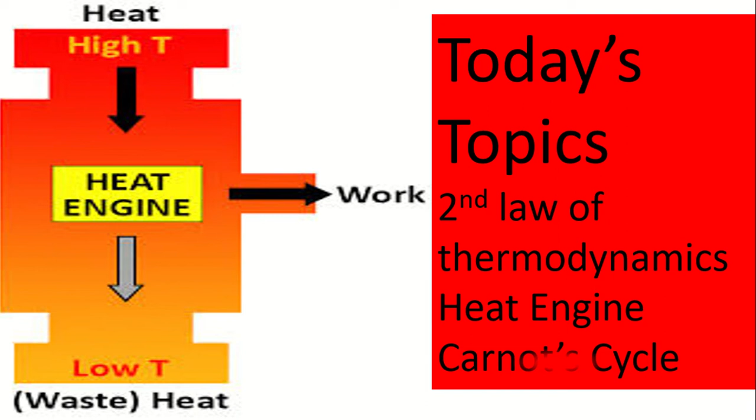Dear students, today I will explain some topics from thermodynamics: the second law of thermodynamics, heat engine, and Carnot cycle. So let's start the class.

At first, I will explain the second law of thermodynamics. I will explain some statements of different scientists, physicists.

Dear students, out of different energies, what is the speciality of heat energy? Do you know? All other energy can be converted into heat energy very easily, but heat energy cannot be converted into other energy easily. To convert heat energy into any other energy, a device is required. This device is called heat engine.

Depending on experimental experiences, scientists named Carnot, Planck, Kelvin, and Clausius, after various experiments, formulated the second law of thermodynamics. Different scientists have stated the law in different ways. So let's see what they think.

Kelvin Planck statement, at first: It is impossible for a heat engine to produce network in a complete cycle if it exchanges heat only with bodies at a single fixed temperature.

Clausius statement: It is impossible to construct a device operating in a cycle that can transfer heat from a colder body to a warmer one without consuming any work.

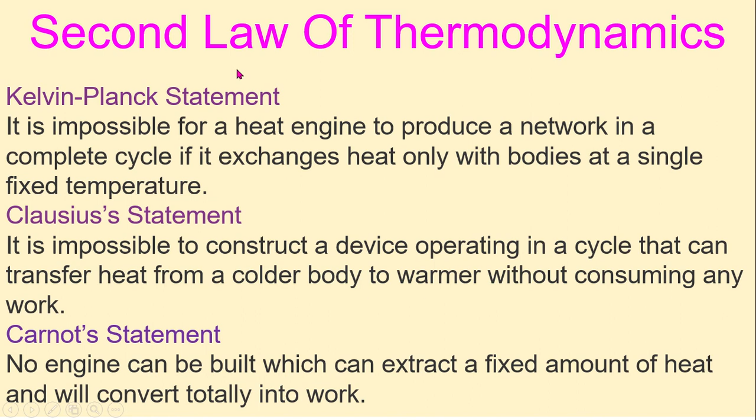So from the second law of thermodynamics, we came to know that for converting heat into other forms of energy, a heat engine is required.

So now I will explain heat engine. Heat engine: the device which converts heat energy into mechanical energy is called heat engine.

Look here, I have taken some gaseous substance in a container, and a tightly fitted piston is over there. Look, when heat is supplied to the system, then the gas expands. As a result, the piston goes upward. So if I keep some cotton or jute fiber on this piston, then the cotton or jute fiber will be compressed when the piston goes upward.

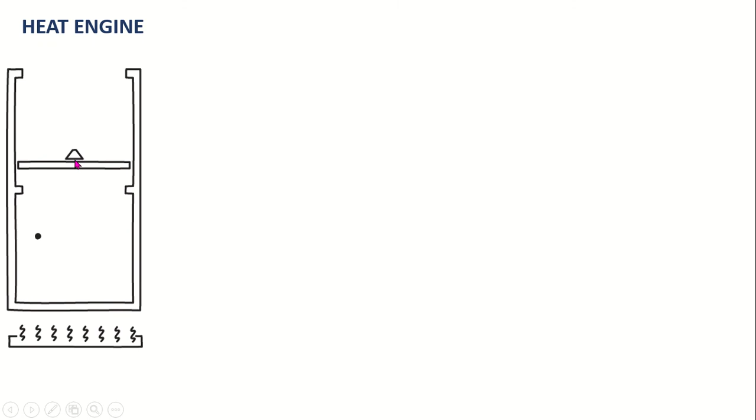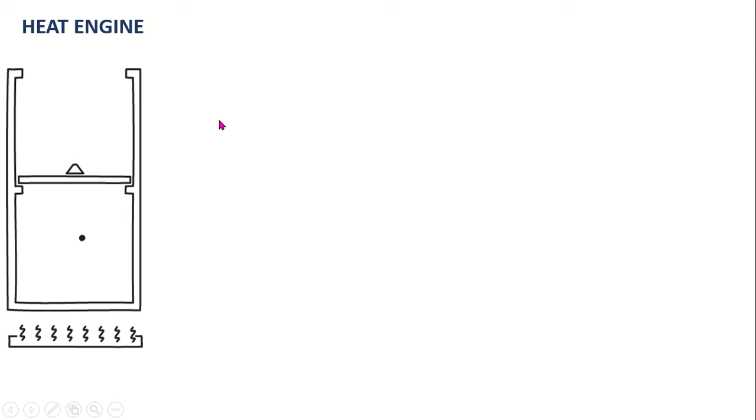So in this way, if I consider it as an engine, then it does work. That is, the engine absorbs heat from a source of higher temperature body and converts a part of it into work, and rejects the remaining part of the heat to a sink of lower temperature, and the initial condition is restored.

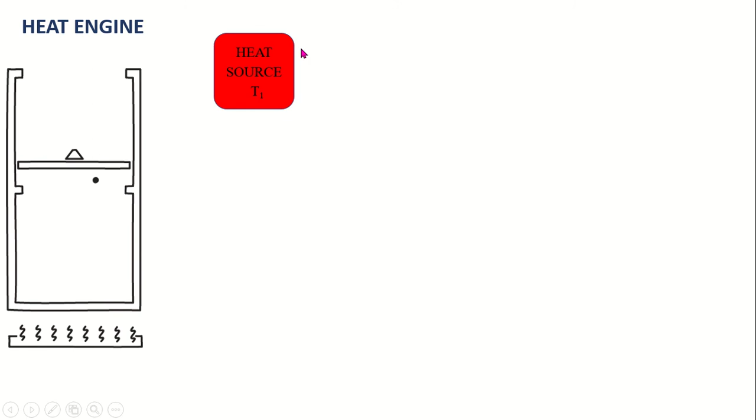So an engine has three parts: there should be a heat source which is at temperature T1, a system, that means working system, and a heat sink.

To get a continuous supply of work from an engine, the cycle of operations are to be repeated. Since the cycle of operation can be repeated indefinitely, the heat engine gives a continuous supply of work indefinitely.

So let's look here. Let a working substance such as a gas in a cylinder, look here, I have taken some gas in a cylinder fitted with a piston, absorb Q1 amount of heat. Here, this cylinder containing gas is the system. So this system absorbs Q1 amount of heat from the heat source.

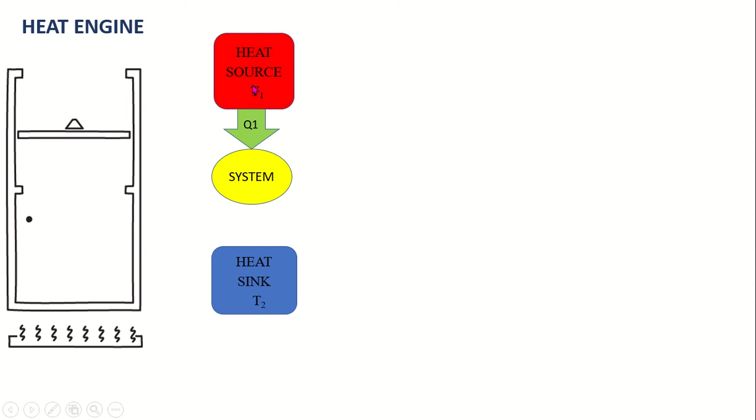Q1 amount of heat from a heat source of higher temperature T1. The engine attains the temperature of the source during converting a part of heat into work. That means here the system attains the temperature of the heat source, that is T1.

The engine attains the temperature of the source during converting a part of heat into work. Now to get work from the engine, that means to convert heat energy into mechanical energy, a part of heat absorbed from the source is to be rejected to the heat sink, which is at lower temperature T2. So the heat absorbed by the system, a part of that is rejected to the heat sink at lower temperature, so that the temperature of the working substance is lowered to absorb heat from the heat source again.

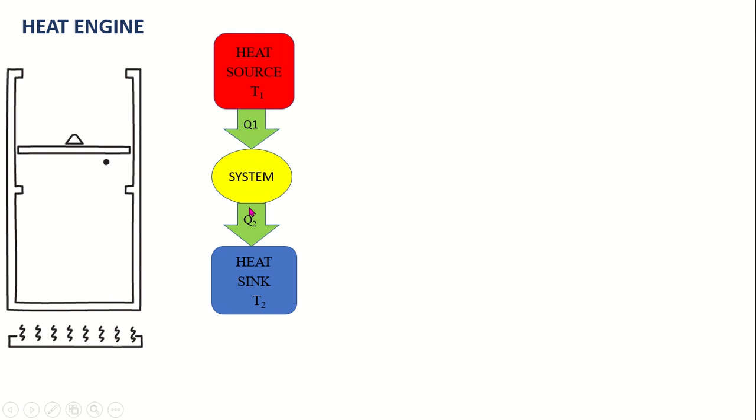So if Q2 amount of heat is rejected to the heat sink at lower temperature T2, the amount of work will be W. Here W equal to Q1 minus Q2, because the system absorbs Q1 amount of heat, then it does work, and then it rejects Q2 amount of heat.

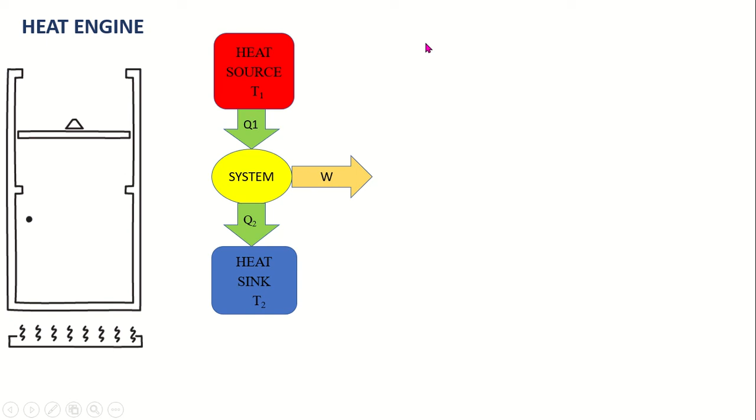So from the conservation of energy, we can write heat absorbed equal to Q1 equal to Q2 plus W. Here Q1 is the input and output is Q2 plus W. We know from conservation of energy, input energy equals output energy, meaning there is no dissipation of energy; energy is only converted from one form to another. So I can write Q1 equal to Q2 plus W, and from here the work done by the engine equals W equal to Q1 minus Q2.

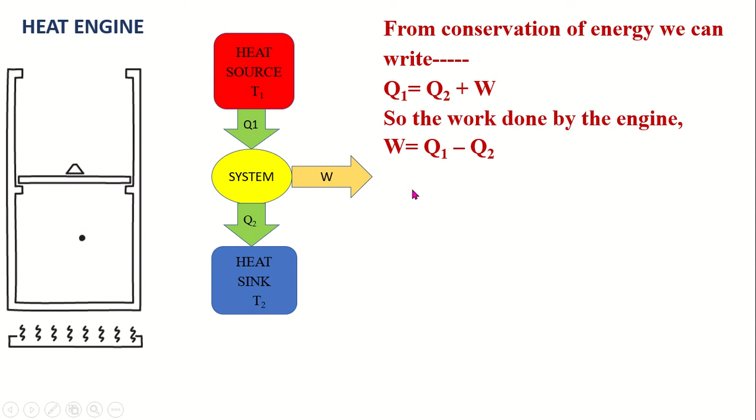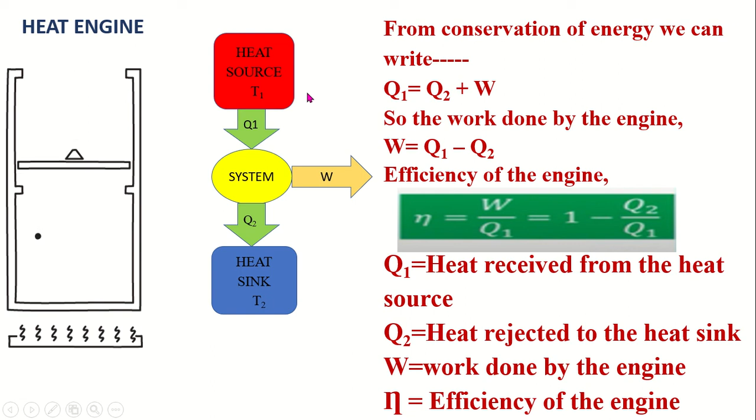Efficiency of the engine is termed by eta. This symbol which looks like small n is named eta. So eta equal to output by input, W by Q1, but W equal to Q1 minus Q2 by Q1. So we can write Q1 by Q1 equal to 1 minus Q2 by Q1. This is the efficiency formula of an engine, where Q1 is the heat received from the heat source, Q2 is the heat rejected to the heat sink, and W equal to work done by the engine. So you can see the steps of the engine, and eta is the efficiency of the engine. You have to remember, efficiency is calculated in terms of percentage.

Now I will explain reversible and irreversible process. Before explaining the Carnot cycle, it is very important to know about reversible and irreversible process. So what is a reversible process? It is the process which can be retraced in the opposite direction so that the system and the surroundings pass through exactly the same states at each stage as in the direct process.

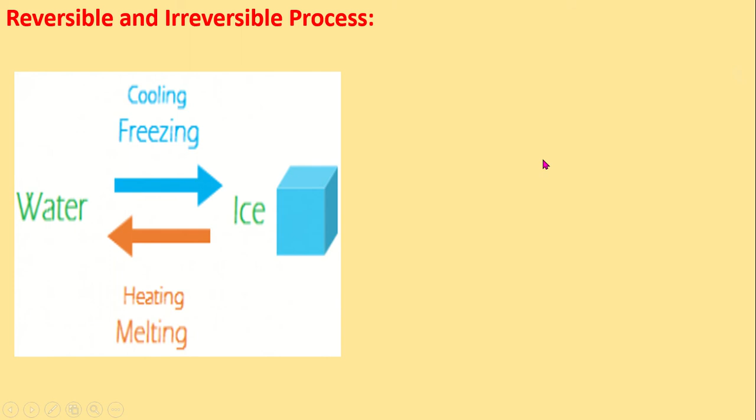Look here, water cooling or freezing converts into ice, and ice on heating or melting converts into water. So this is a reversible process. Ice turns into liquid and liquid turns into ice. It is a reversible process.

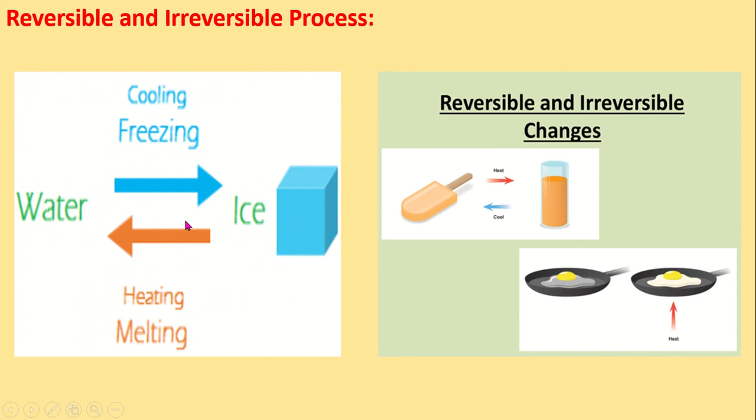There is a video which can make you more clear about irreversible process. So let's enjoy it.

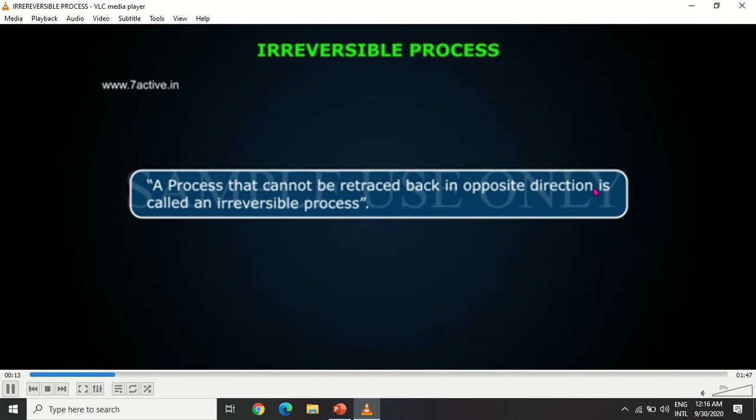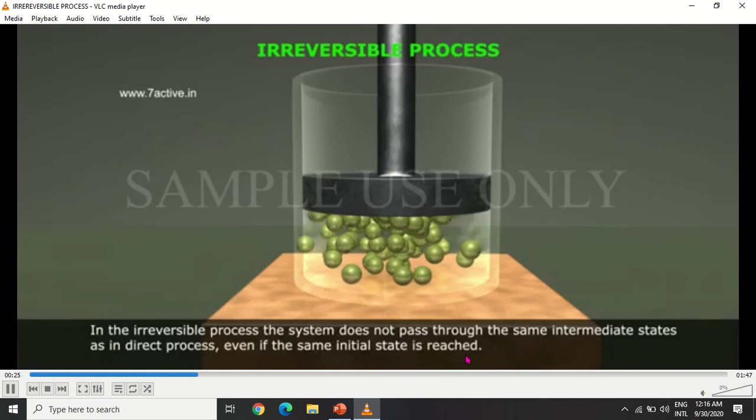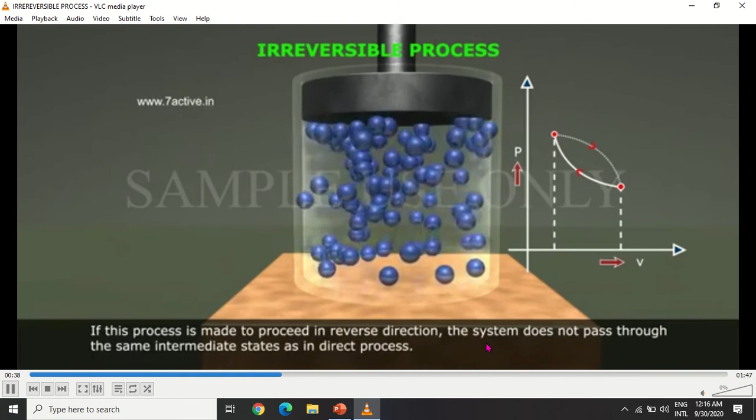Irreversible process: a process that cannot be retraced back in the opposite direction is called an irreversible process. In the irreversible process, the system does not pass through the same intermediate states as in the direct process, even if the same initial state is reached. During this process, the system may undergo several intermediate states of equilibrium. If this process is made to proceed in reverse direction, the system does not pass through the same intermediate states as in the direct process.

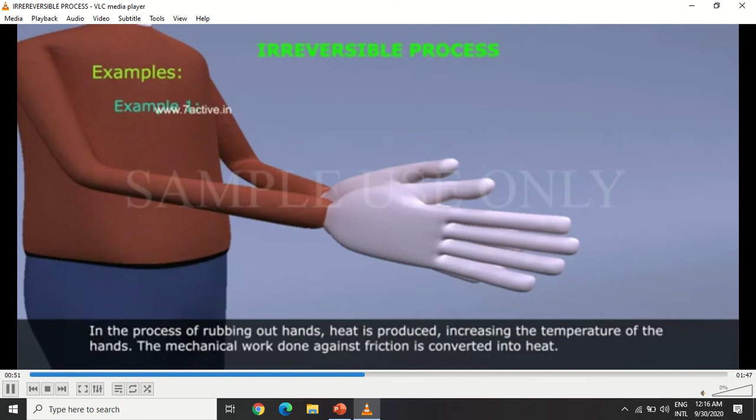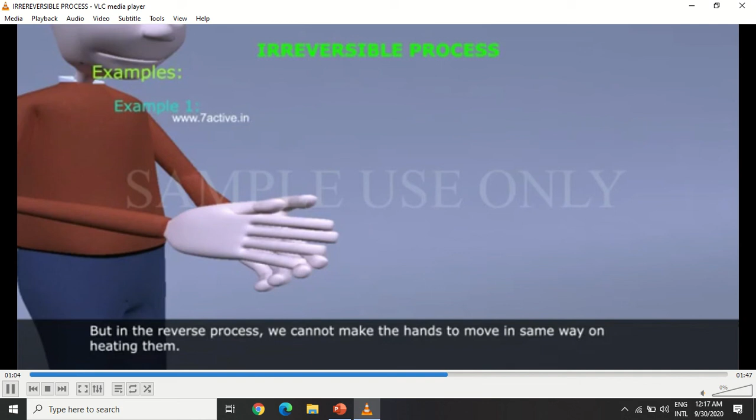In the process of rubbing our hands, heat is produced, increasing the temperature of the hands. The mechanical work done against friction is converted into heat. But in the reverse process, we cannot make the hands move in the same way by heating them.

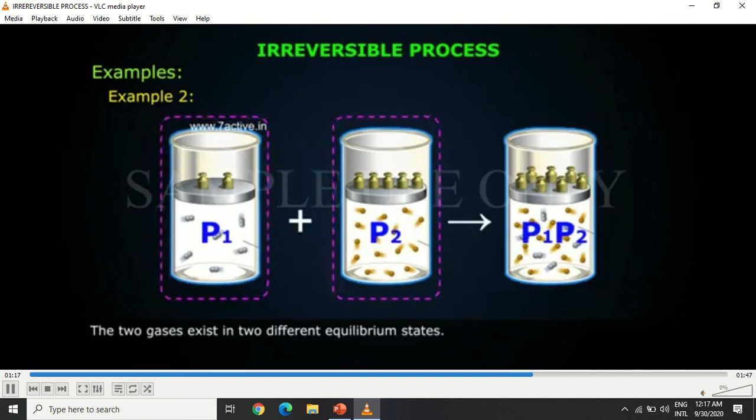Consider a process of mixing up two gases which do not react with each other. The two gases exist in two different equilibrium states. In the process of mixing them at constant temperature in a cylinder, the mixture attains a new state in thermodynamic equilibrium. The pressure of the mixture is greater than the individual pressures and possesses the same volume. In the reverse direction, the gases cannot be separated to their initial condition by decreasing the pressure.

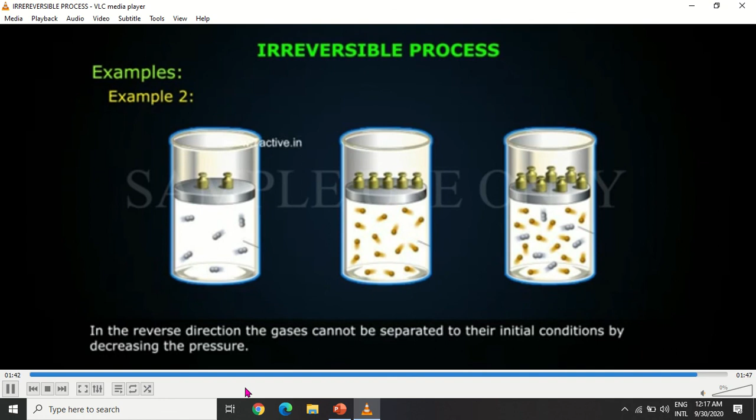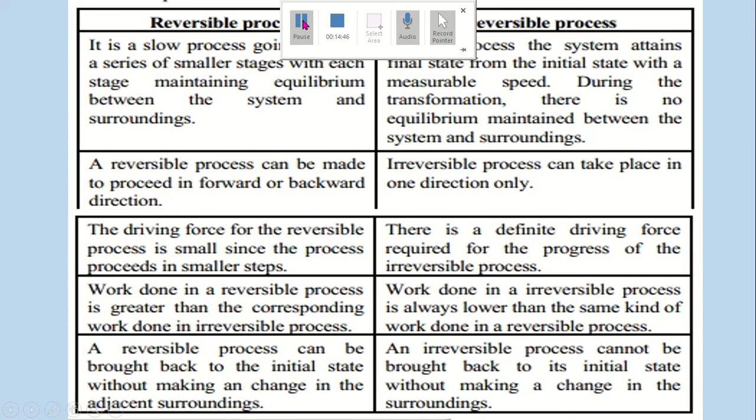There is a comparative discussion between reversible and irreversible process. Let's try to understand it. A reversible process is a slow process going through a series of smaller stages with each stage maintaining equilibrium between the system and surroundings. In this process, the system attains the final state from the initial state with a measurable speed. During the transformation, there is no equilibrium maintained between the system and surroundings.

A reversible process can be made to proceed in forward or backward direction. An irreversible process can take place in one direction only. The driving force for the reversible process is small since the process proceeds in smaller steps. There is a definite driving force required for the progress of the irreversible process.

Work done in a reversible process is greater than the corresponding work done in an irreversible process. Work done in an irreversible process is always lower than the same kind of work done in a reversible process. A reversible process can be brought back to the initial state without making a change in the adjacent surroundings. An irreversible process cannot be brought back to the initial state without making a change in the surroundings.

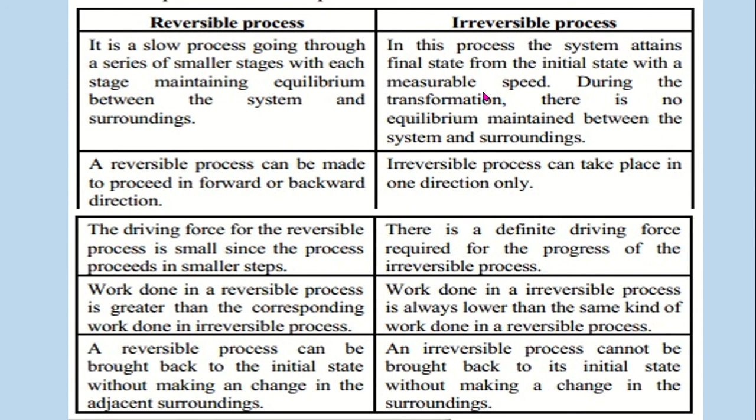Now I will explain the Carnot engine. Sadi Carnot conceived an ideal engine to convert heat energy to mechanical energy, which is free from all imperfections of an actual engine, and this is known as the Carnot engine.

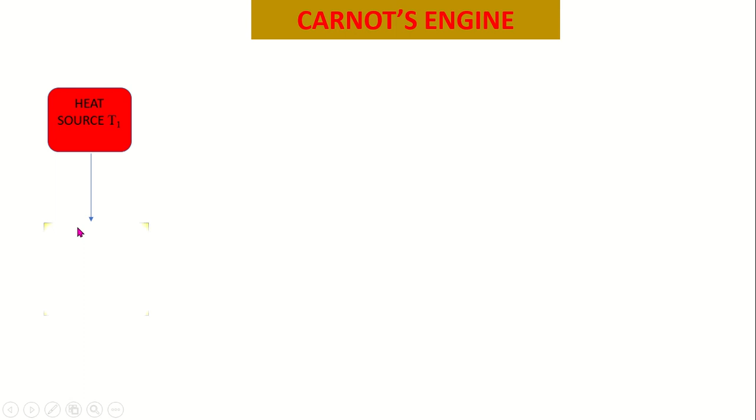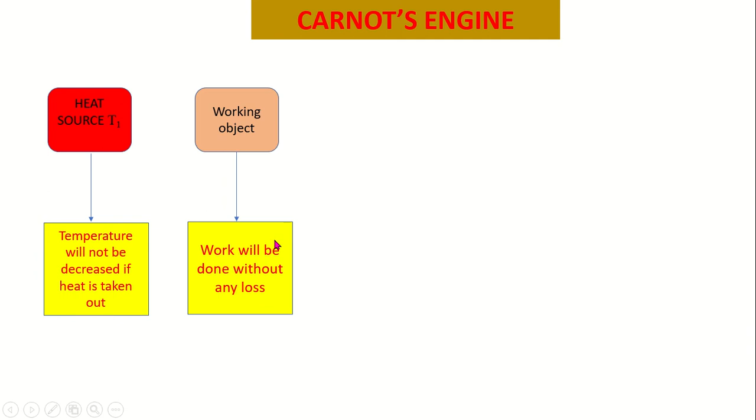In this engine, there is a heat source of temperature T1, where temperature will not be decreased if heat is taken out. There is also a working object where work will be done without any loss, an insulated platform made of insulating material, and a heat sink at temperature T2, where temperature will not increase though heat is absorbed.

That means in case of the heat source, heat is given out but temperature will not be decreased. And in the heat sink, heat will be absorbed but temperature will not be increased. The working substance or working object is that where work will be done without any loss.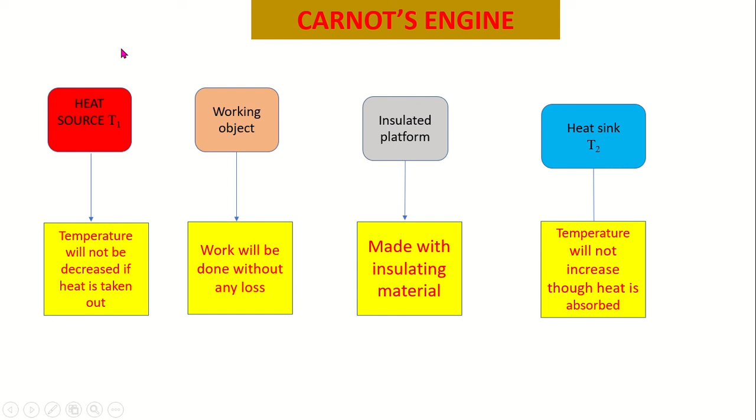Now look how the Carnot engine works. Look here: heat source, heat insulating platform, and heat sink. A cylinder C is taken, with perfectly non-conducting walls and a perfectly conducting bottom. These walls are non-conducting but the bottom is conducting.

It is fitted with a tightly, perfectly non-conducting and frictionless piston. An ideal gas is enclosed in the cylinder which acts as the working substance. The heat source is a hot object with very high thermal capacity, maintained at temperature T1. Any amount of heat can be taken out from it without changing its temperature.

As I told you, heat can be taken out from it but the temperature will not be changed. The sink is a cold object with very high thermal capacity, maintained at a lower temperature T2. Any amount of heat can be rejected to it without changing its temperature, meaning its temperature will not be increased. The platform is a completely insulating object on which the cylinder is placed.

Now I will explain the steps. This Carnot engine works in 4 steps. Step 1: a cylinder C should be taken. This cylinder is at first placed on the source, and within a very short period the gas attains the temperature of the source. At this stage let the pressure and volume be represented by P1 and V1.

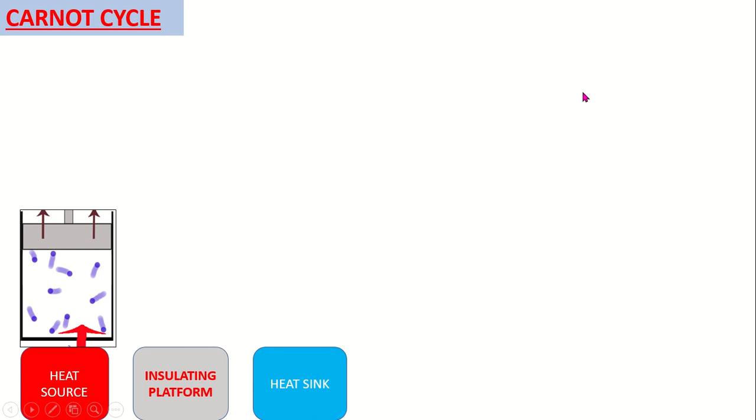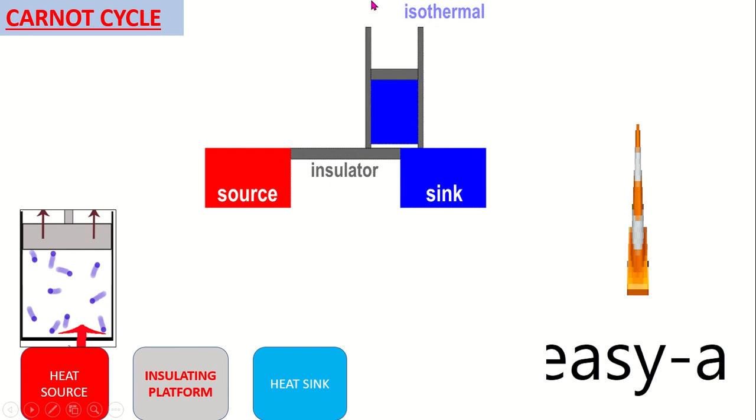The ideal gas is then allowed to expand isothermally, and at the end of the process its pressure and volume become P2 and V2. Initially the pressure and volume of the enclosed gas was P1, V1, and when it expands isothermally, meaning temperature remains constant, that is not actually possible because when any substance absorbs heat, its temperature should increase. But Carnot assumes that here the gas expands isothermally where temperature remains constant.

So when it is expanded isothermally, at the end of this process the pressure and volume of the gas become P2 and V2, but temperature remains T1. Initially its temperature was T1, and finally also T1, because temperature should be constant in an isothermal process, and it absorbs Q1 amount of heat when the system is placed on the heat source.

Step 2: now the cylinder is placed on the insulating platform. Look here in this animation: at first on the heat source, then the insulating platform, then the heat sink. So when the cylinder is placed on the insulating platform, the enclosed gas is allowed to expand adiabatically.

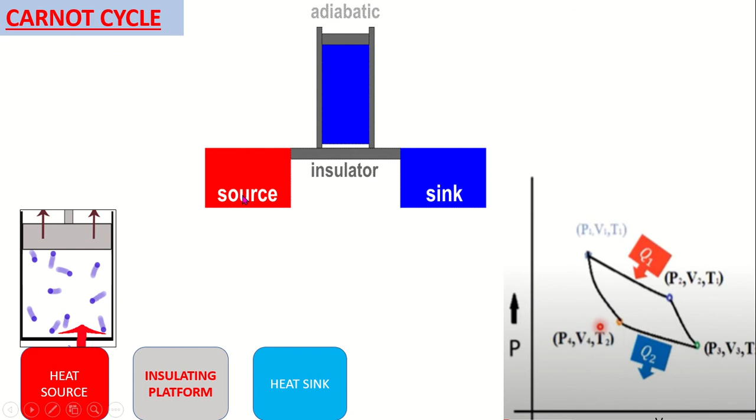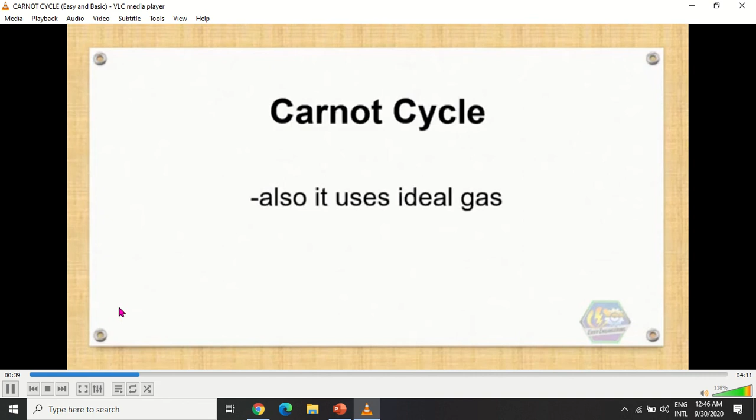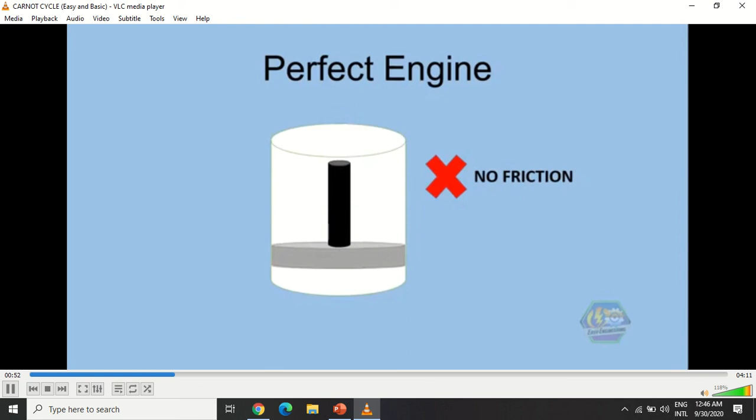Now there is a video for you which will make you more clear about the position. It also uses ideal gas as its working medium, and note that this is a perfect engine. No friction in between piston and cylinder walls.

And no heat transfer between the surroundings and the system is considered. Now let's discuss how this interesting cycle works by exploring its processes, which are reversible processes.

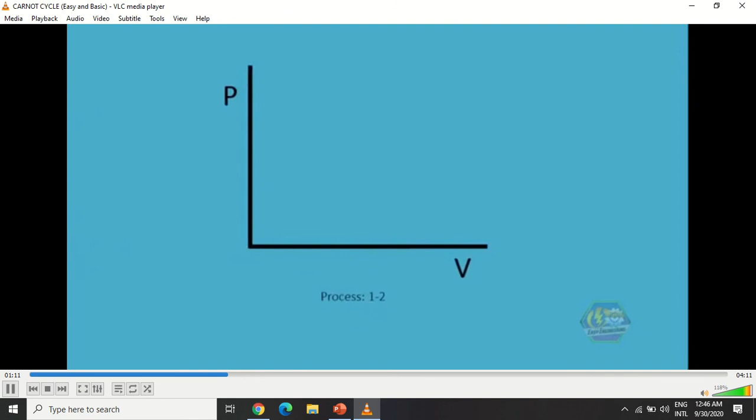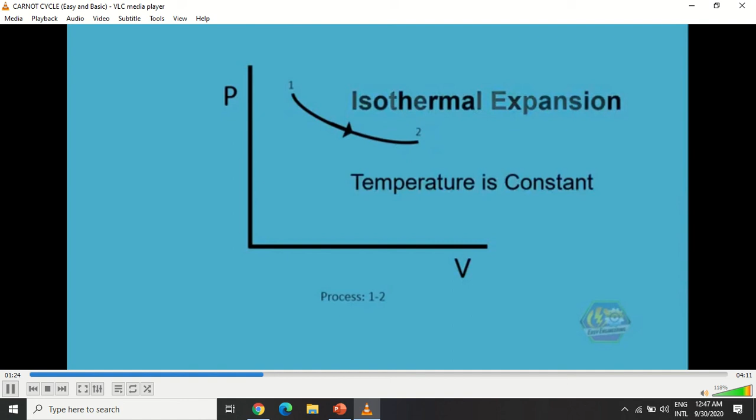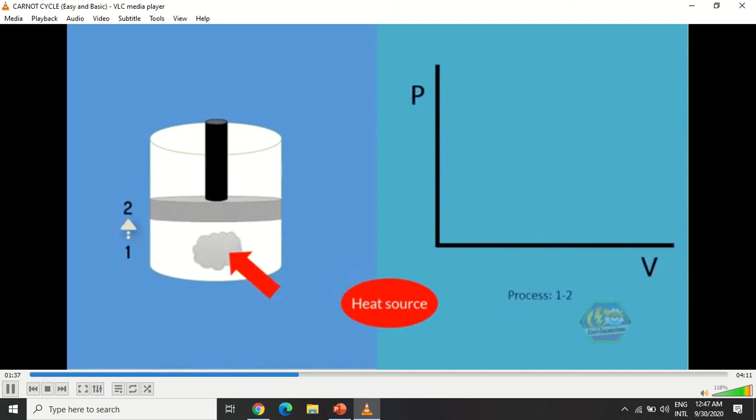So now for the first process, process 1 to 2. This process is called isothermal expansion. Isothermal in thermodynamics means no change in temperature; temperature is constant or unchanging within this process. What happens here is that heat energy from the heat source is transferred into the ideal gas. As a result, the gas expands, which increases the volume and decreases the pressure.

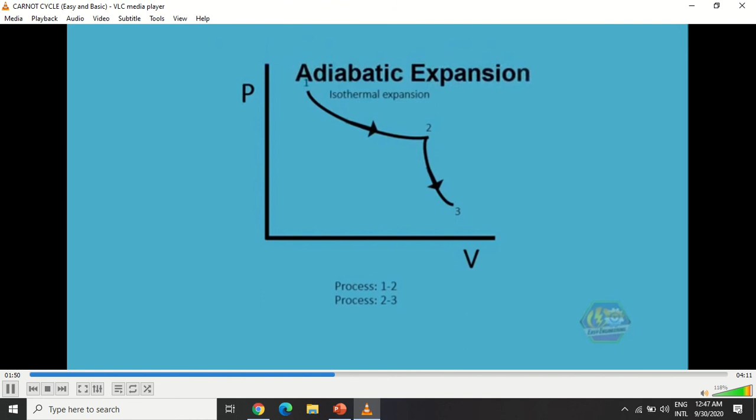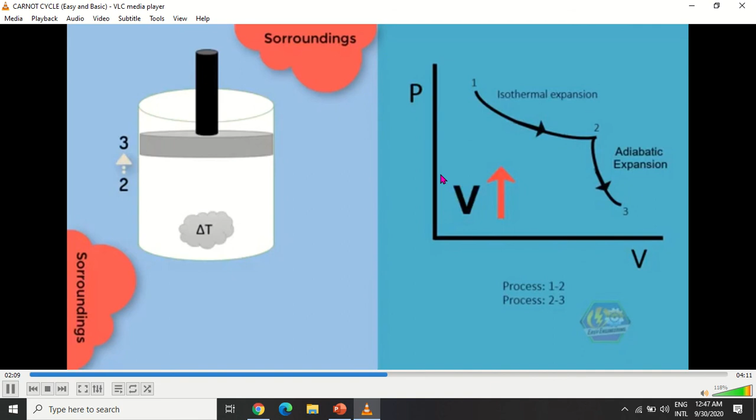Next, process 2 to 3, which is called adiabatic expansion. Adiabatic in thermodynamics means there is no heat transfer between surroundings and the system, but simply a change in temperature. In this process, volume increases and pressure decreases.

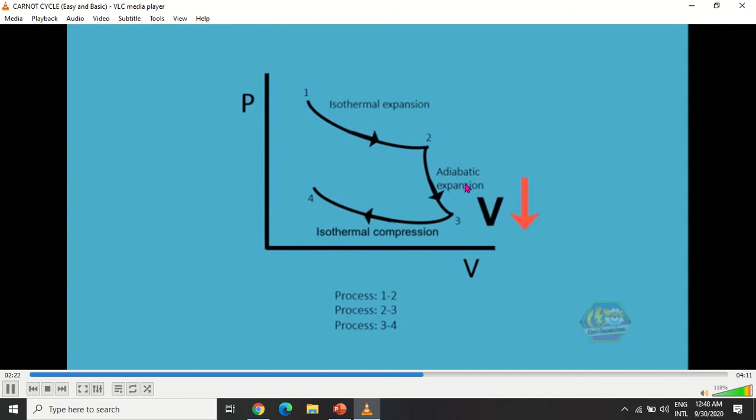The third process is the isothermal compression. By compression, it means volume is decreased and as a result pressure increases. In this process, energy from the gas is transferred into the heat sink.

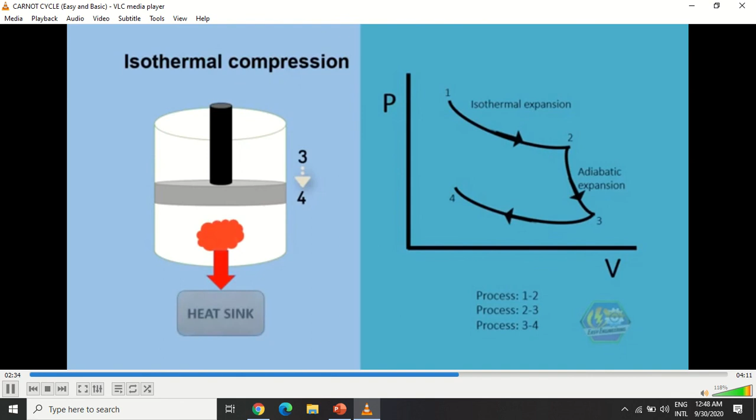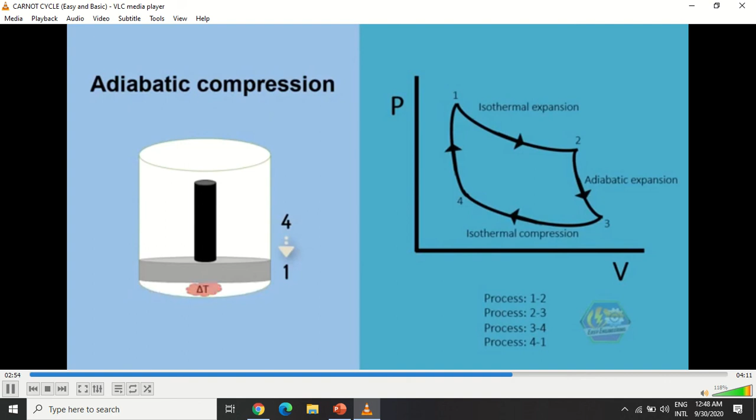And finally, the last process, called adiabatic compression. Since it's adiabatic, no heat is exchanged with the system, so change in entropy is zero. Since this is compression, it means our volume decreases while our pressure increases. So that's it, that makes it a cycle.